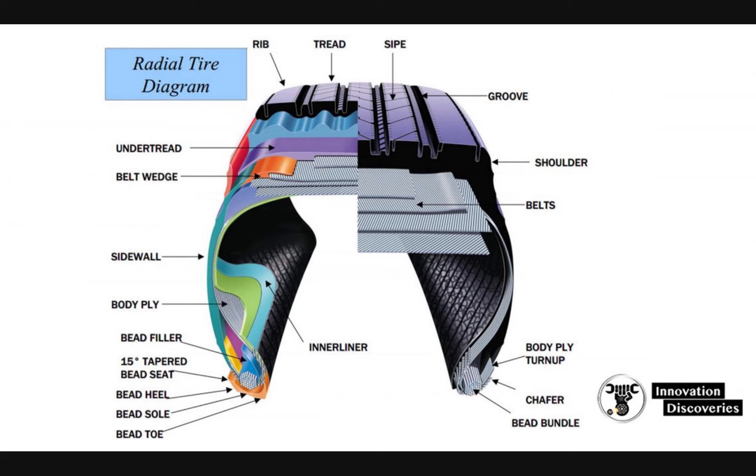Tires and the feasibility of reusing tires. Tires are an extremely complicated modern marvel of engineering, and I think a base level of understanding is required to get anything from this presentation, so while I won't dive too deep, here is all you need to know.

First, the word grip, otherwise referred to as traction, is the coefficient of friction between the tire and the road surface. As you are likely aware, tires are the only thing on a car that actually touches the road, and they create grip in two ways.

For one, the rubber generates friction as it rolls along the road surface, but tires also have a tread pattern, and while we won't get into the specifics of tread patterns and how they work, just understand that the pattern allows the tire to make another form of grip called mechanical grip.

Tire tread essentially allows the tire to function as if it were a gear meshing with the road's surface, which provides mechanical leverage against the uneven bits of the road while effectively increasing the surface area of the tire, while also acting as a path for water to escape from underneath the tire, reducing the chance of hydroplaning.

Tread also deals with various kinds of road debris, like small rocks or mud. However, this is really only beneficial on rougher terrain or off-road, and it is detrimental on a completely flat surface like a racetrack or even just polished concrete, where the tread can't actually dig into anything to increase grip.

Moving on, it is important to understand that literally all of the control you have over the entirety of your vehicle's weight, and where that weight is going, relies on these four small patches of rubber tire tread. What that effectively means is tires are the limiting factor. Therefore, better tires allow everything about the car to be better.

You get better handling, better acceleration, and importantly, better deceleration, which means of course that you get a shorter braking distance, making the vehicle safer as a whole. Tires are quite literally the most important safety feature on any car.

The likelihood of you stopping in time to avoid an accident, or being able to dodge the accident entirely, relies on good tires and their ability to give you predictable and consistent control over your vehicle. This is the case no matter what vehicle you are in, and since lives depend on good tires, this means tires must adhere to extremely high standards of performance and be nearly perfectly reliable.

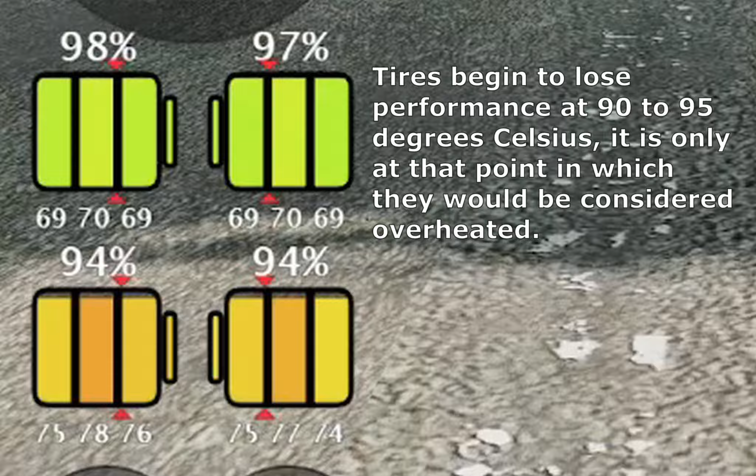Now let's get into what it takes to make something this high performance a reusable product, and what consequences may arise from doing just that. For some context, you should be aware that the tire industry is an absolutely massive global industry.

As of 2022, it was valued at $245.53 billion US, and that number will likely be nearing upwards of $400 billion by 2030. This, of course, means people have already raised this question, and reusable tires already exist to an extent. So before getting into theoretical, 100% reusable tires, let's quickly go over what already exists.

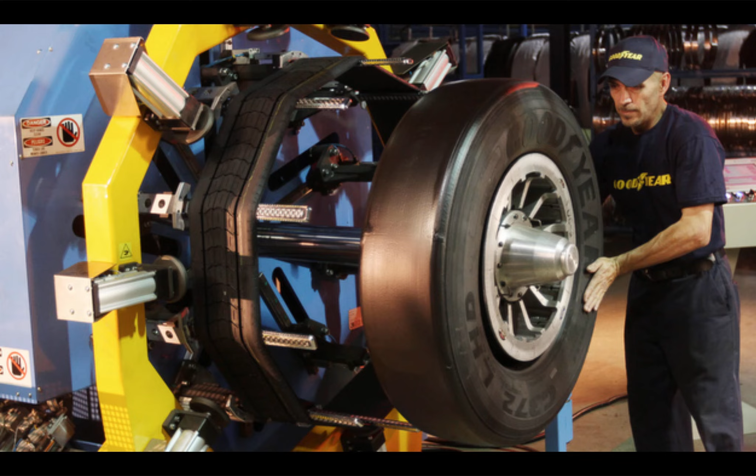However, before we can get to that, we also need to go over the basics of tire construction. You've likely gathered that a tire is not just a squishy rubber balloon, and in fact, tires are a much more complex, decently rigid, steel-reinforced combination of several materials. We can't get into explaining every part in depth, but it is necessary for you to understand that tires are essentially divided up into 2 main sections.

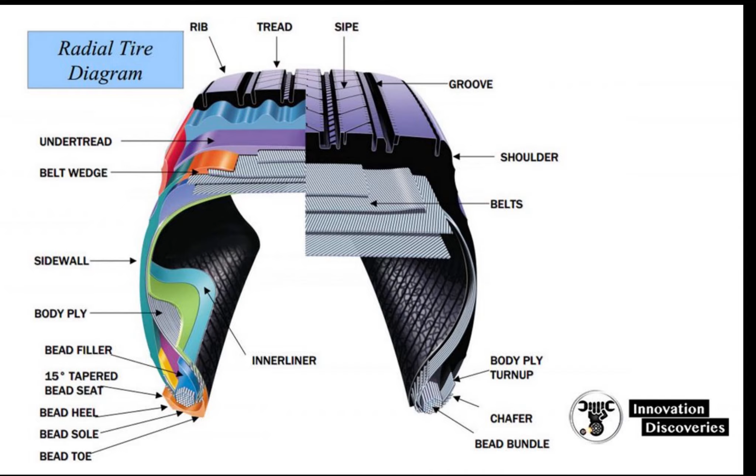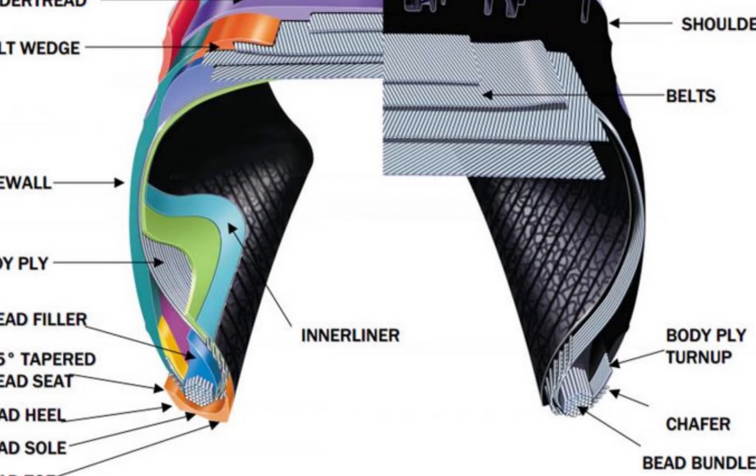The inner airtight structural casing, which itself is made up of a combination of materials including steel bands that help ensure the tire treads hold its shape, and then the exterior layer of tire tread, which is the part that actually contacts the road, and it is primarily made up of rubber. Sometimes multiple different kinds of rubbers are used for different sections of tread.

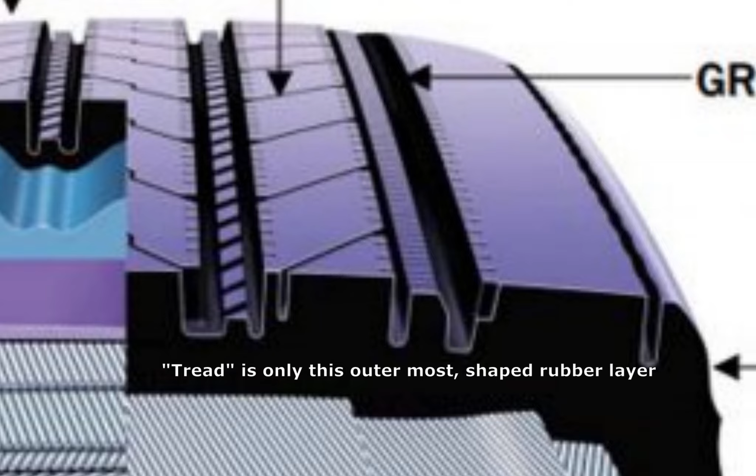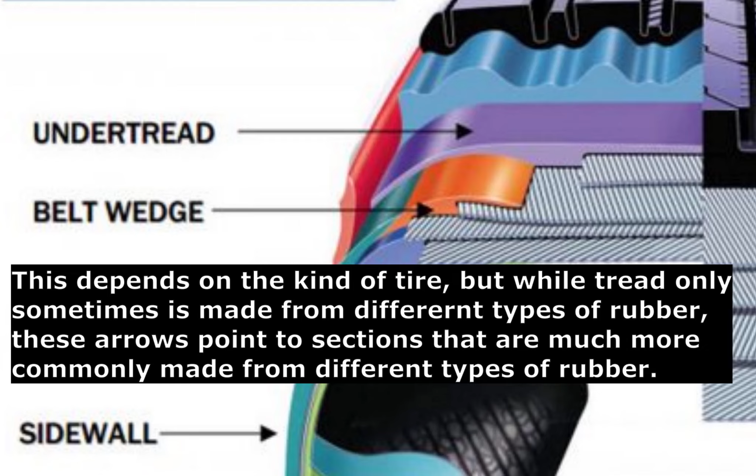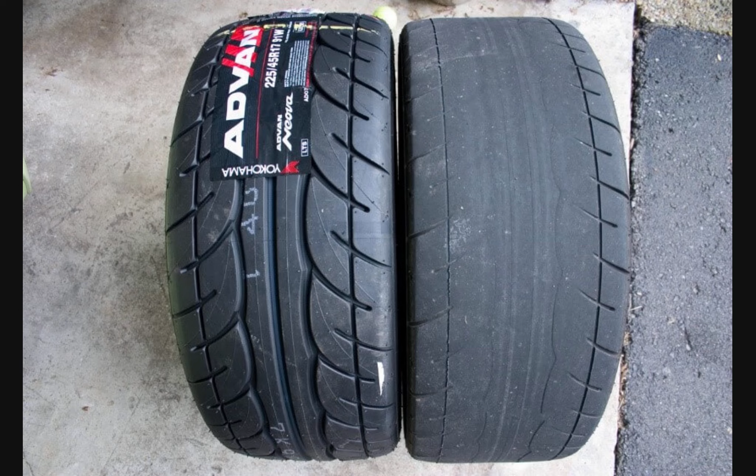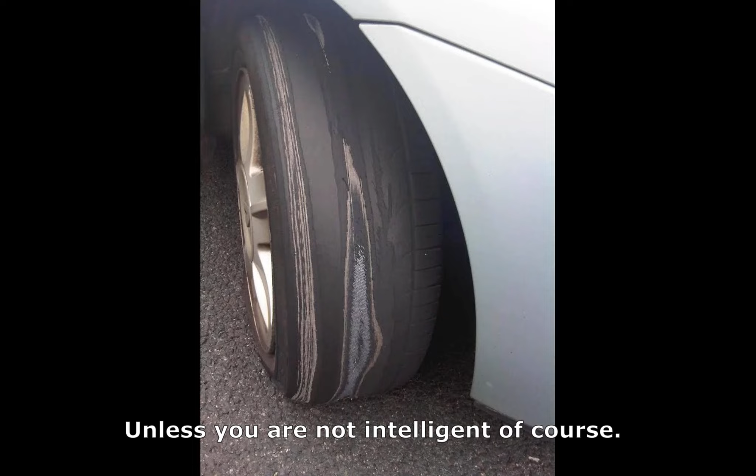Regardless, this means the tread is the part that deals with almost all the wear, and the tread effectively protects the inner casing. Since a tire stops making effective grip once this tread layer is worn down, and this happens long before the tread layer is completely worn through, tires are always replaced before the inner casing begins to take any damage, meaning the inner casing is typically still in near perfect condition by the end of the tire's useful life. This fact presents a fairly straightforward method of reusing a tire, where you take a used tire and simply replace the outer tread layer.

This process entirely reuses the inner casing and is called retreading. Retreading is currently the primary method for reusing tires. As a result, retreaded tires are fairly common, especially on large semi-trucks and other fleet vehicles. And this is because retreaded tires are half, if not a third, of the cost of new tires.

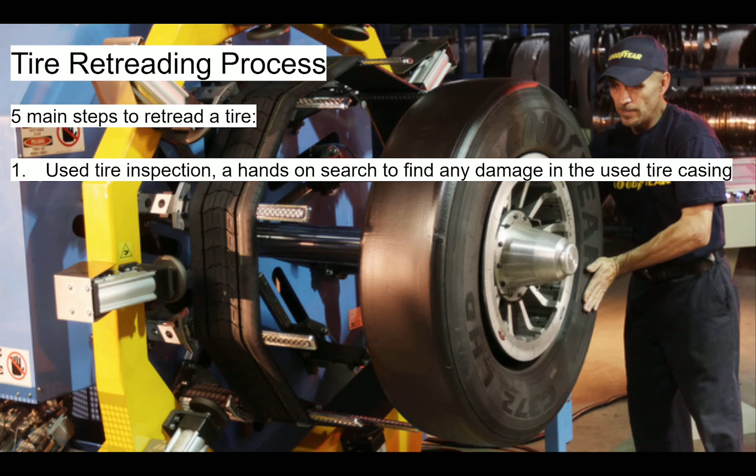Generally, a casing can be retreaded 4 times before it is deemed too much of a safety risk to retread again. Thus, retreading also significantly reduces waste on top of costing less than a new tire. The process of retreading involves heating the old tire, adding new rubber, then forming a new tread with the mold.

But it isn't quite that simple, and this is because of what was mentioned in regards to the high standards tires must adhere to. Since a tire must be perfectly reliable, the inner casings you retread cannot be damaged in any way, and they essentially need to be perfect to ensure the final product can achieve those safety, reliability, and performance standards. This means a significant amount of used tires are not safe to be retreaded, so retreading is far from a 100% reusable solution, and it can never achieve that, no matter how perfect the process becomes because of another issue.

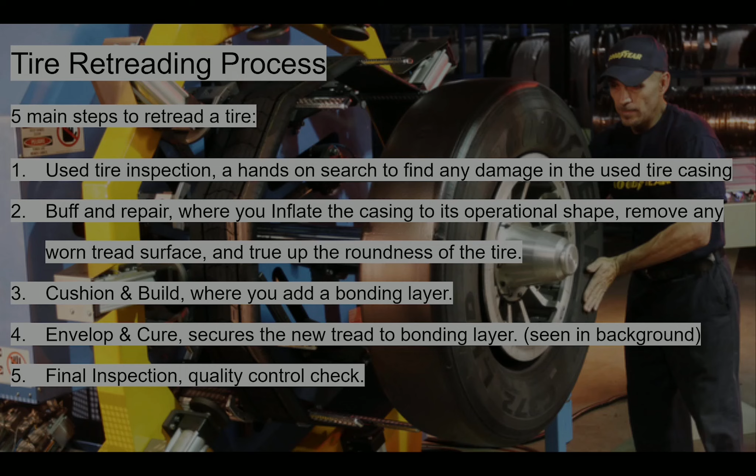The rubber in tires ultimately hardens over time, and undergoes a process called dry rotting, where it becomes hard, brittle, and cracks apart, so no matter what, tires will always get to a point where they eventually cannot be reused. Luckily, tires are recyclable.

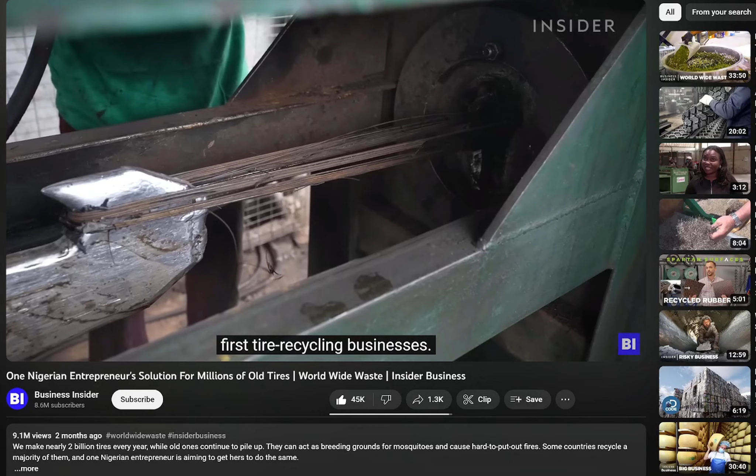However, it's not easy and very energy intensive. Machines must be used to separate the steel and other materials out from the rubber. And regardless of how this is done, the rubber is going to be full of impurities.

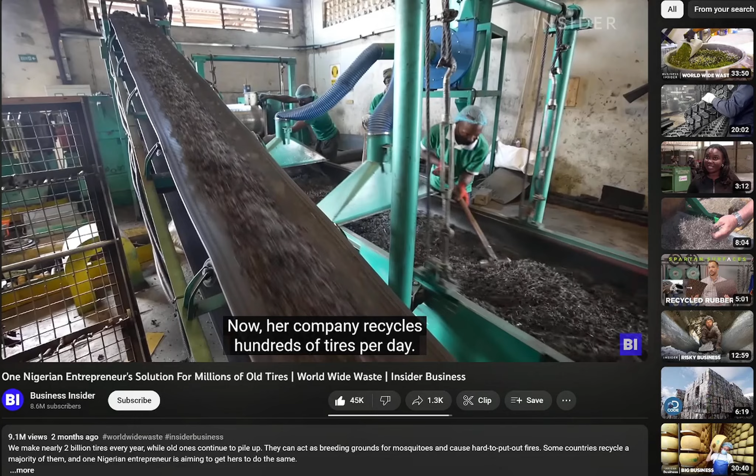It's worth pointing out you also have to transport your used tires to a tire recycling center. And there also needs to actually be a recycling center that deals with tires properly in your area for you to even have this option. This is a major factor that leads to tires ending up in landfills. On top of that, some places, especially less developed countries, don't have the ability to recycle their tires whatsoever.

However, this is slowly changing as more people are figuring out more low-tech ways of handling the recycling process. As a result of these recycling logistic problems, many people have proposed ways of fully reusing tires, reinventing them to avoid these issues. However, the tires have essentially evolved over time to be the best at what they do, and there are almost zero alternative methods of doing what tires do without serious problem.

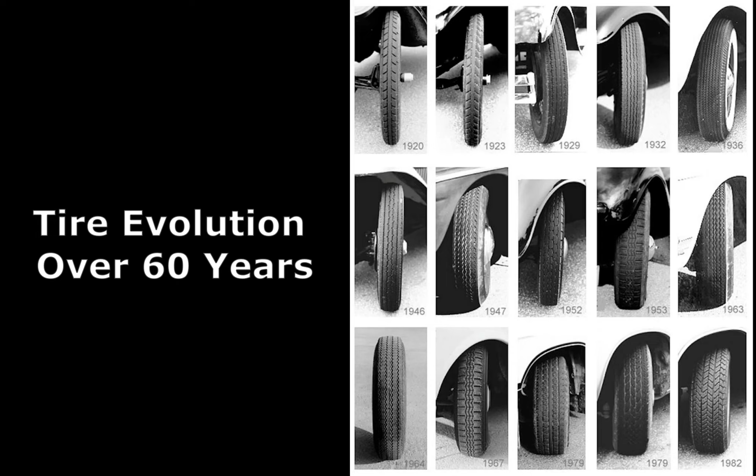We really should not reinvent tires. Furthermore, our cars and all of the corresponding vehicle industries are also entirely built around tires and how they currently work, and to change how tire functions means we would need to fundamentally reinvent cars, their infrastructure, and their industries. And at this point, we're not solving any current issues and just making vehicles less useful.

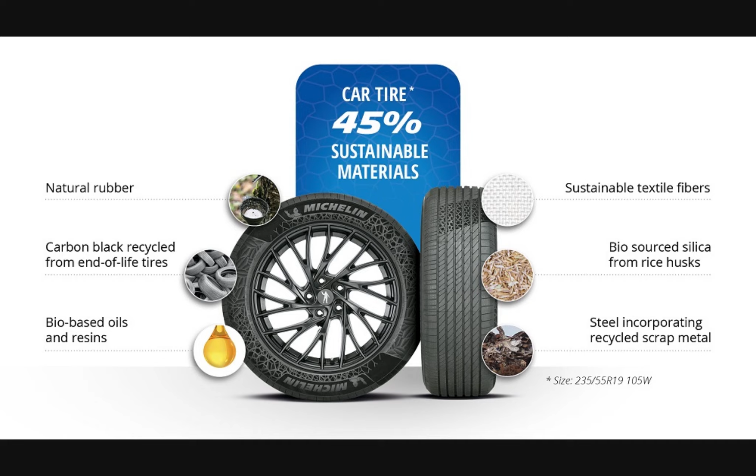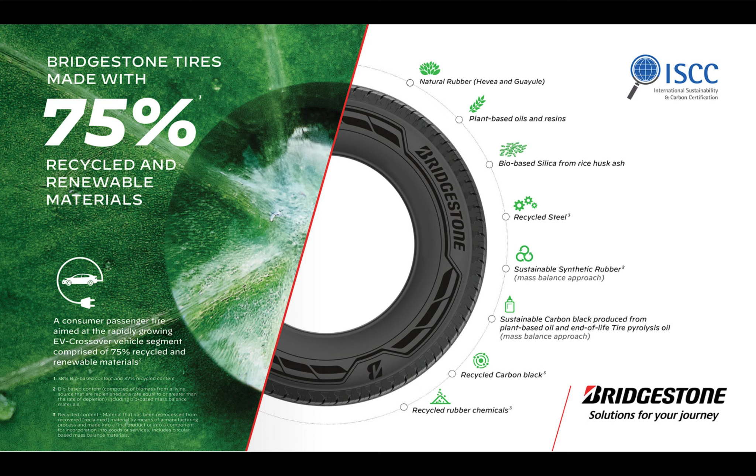One of the only truly feasible solutions to reusable tires problem is a tire that is still a tire, but 100% made from recyclable materials, and itself easily recyclable. We're already making progress in this direction, as several companies already utilize recycled material in tire construction, while also predicting and in some cases directly demonstrating that 100% recycled material tire which can achieve current tire performance standards is possible, so it is very likely this is the future.

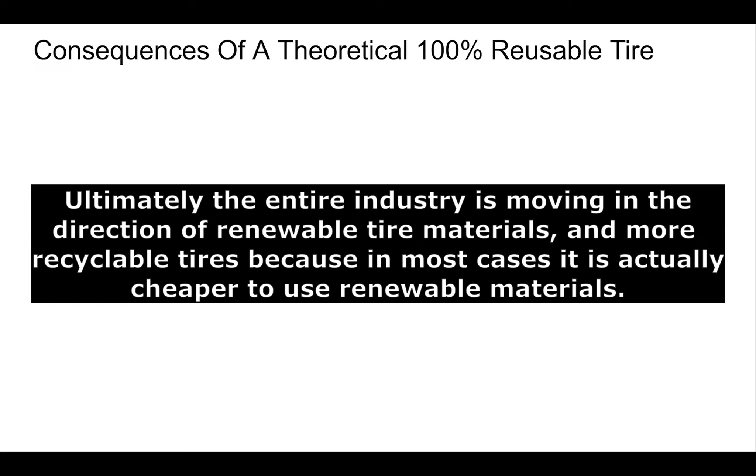The consequences of achieving 100% reusable tires via recycling becomes a material science problem at its core. Tires becoming more recyclable would likely involve lots of change to the tire design.

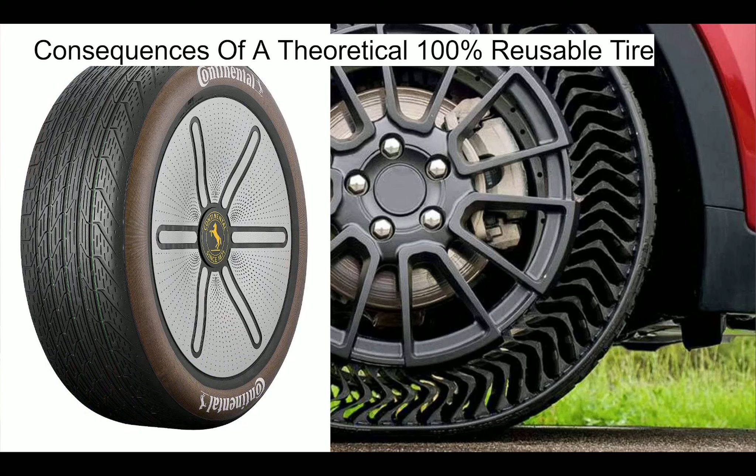We may still need steel, but as a completely separate internal structure, not permanently molded within the rubber. We could do away with steel, developing something like a stiffer rubber that could achieve what steel achieves, but that will not be easy, especially with the increasing weight of modern-day vehicles. Maybe that will force vehicles to become lighter.

But regardless of how this is done, the question remains, what will this all mean for tires themselves? Considering how tires are already always a compromise between things like longevity versus performance, on-road versus off-road, snow versus summer, etc., I think it is safe to say reusable tires will likely be a significant further compromise no matter what.

Some of our current standards may need to change, but a major problem we may face will be that achieving better recyclability, tires will likely have to become biodegradable. Currently, tires are not biodegradable. They do degrade, but they do not simply melt away into nice natural elements that are harmless in the same way as something like paper or food waste.

You are more aware of tire pollution than you think. Everywhere you look, you can quite literally see it. However, you may be unaware of what this actually means for the environment.

A 2017 study estimated that 1.5 million metric tons of tire particles enter the U.S. environment every year. And these tire particles account for 5 to 10% of ocean pollution, contributing to the problem of both microplastics and nanoplastics pollution.

This is something that we will have to consider when making more recyclable tires, and it might become even more important if the tires have worse material properties, wear faster, and generally deposit more rubber into the environment. This is of course something that's hard to predict, but the environmental impact will never not be important.

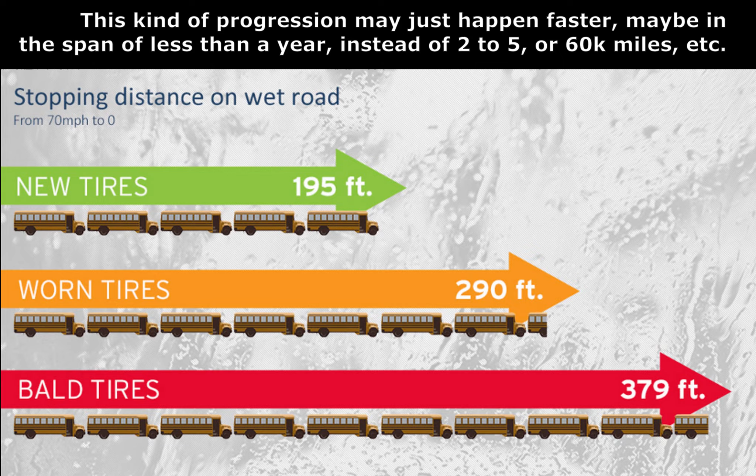There will be trade-offs. These will likely include more waste getting into the environment from the increased wear rate, biodegradability will be more important and necessary, and the practicality and luxury that we enjoy with current tires may become a thing of the past. Things like tires lasting an average of 5 to 10 years before dry rotting, depending on the climate, or how tires last 60 to 75,000 miles before needing replacement due to wear.

Even if they last more than half as long, this will change how tires and our society functions around them. Maybe changes like this make semi-trucks less viable, for example. It'll be more expensive for them to be maintained, as their tires will need replacing much more often, but maybe tires will also be cheaper.

It is unclear exactly what fully recycled tires will cost, due to the overhead of the recycling and old tire transport processes being different than what we have now. And it also isn't something factored into the price of modern tires regardless. If retreading is anything to go off of, we could see significant reductions in pricing, but it is hard to say.

We may see less reliability, meaning more need for spare tires, but maybe we'll find ways of making it so tires are easier to change, or just less likely to leave us stranded in the first place, now that there's more necessity for it.

Maybe prototype technology like tires that have an internal structure and don't need air will become the standard. And maybe things like that will directly allow lower performance materials to be used, again reducing cost and reducing the likely environmental impact all at the same time.